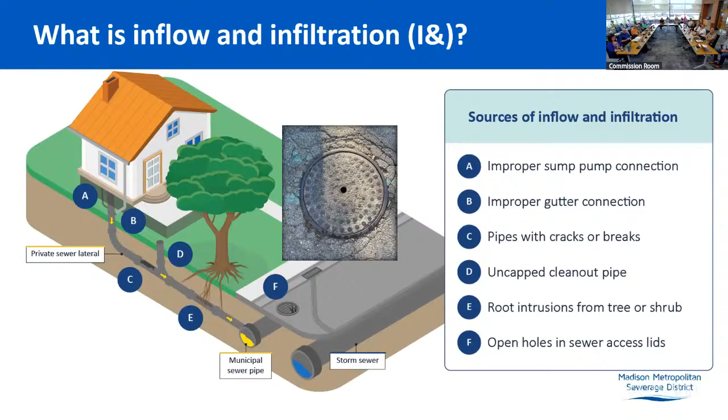So if we move into a little bit more on the municipal side, I'm going to bring up a picture. Open pick holes were often practice, and it is quite amazing if you calculate the amount of water that can come through that tiny little hole when you have, say, 6 inches of water standing over it, like we saw with stormwater flooding on Monday. That can be a big source, but it takes time to swap out all of those covers.

Here's an example of a poor connection. A lateral pipe was connected into one of the district's manholes. It was not sealed very well around the core, and we had gushing water coming in at quite the rate. That was an instance where we worked with the municipality, they worked with the private property owner—it was more of a company rather than a homeowner—and got that grouted and sealed up.

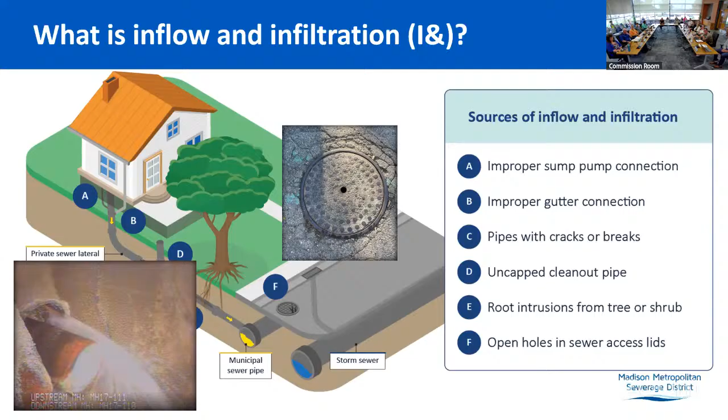But if you think about it, we have 1,500 manholes. Local municipalities have 10 times that, and then every single house connection. So it's kind of the needle in the haystack when you're trying to tackle all of these potential sources. And then one thing that never really gets mentioned, but I like to show this picture.

This is an example of a district manhole in the lower Badger Mill Creek drainage way. Most of the time it's dry, but this was during a March thaw a few years ago, and it becomes a raging river, basically. Once it receded, we looked, these are more sealed, have extra precautions in the construction of the manhole because it's a fairly new manhole. But if you think about any sort of cracks or leaks, you just have this large amount of water that can come inundating into the sanitary sewer.

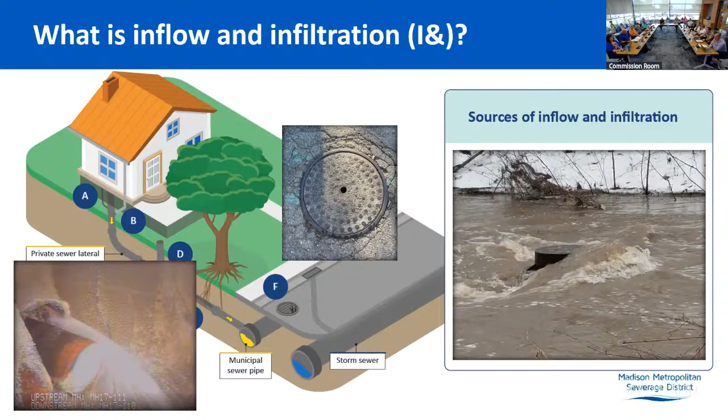So we are required to work on reducing inflow and infiltration, or preventing it. I like to say this is a maintenance program, called the Capacity Management, Operation, and Maintenance program. It's a requirement, a long-term maintenance program, and NR 210 is the code that governs this.

Basically the objectives are you're supposed to eliminate excess I&I. So there's a little bit of a difference there, right? Everybody understands that some is going to get into the system, but what we're trying to do is make sure that it's not excessive. The ultimate goal is we're trying to prevent those sanitary sewer overflows. Can we make sure that we can convey the sanitary wastewater within the sanitary sewer system, and that we're conveying it and treating it here at the treatment plant, so it's not escaping out into the environment.

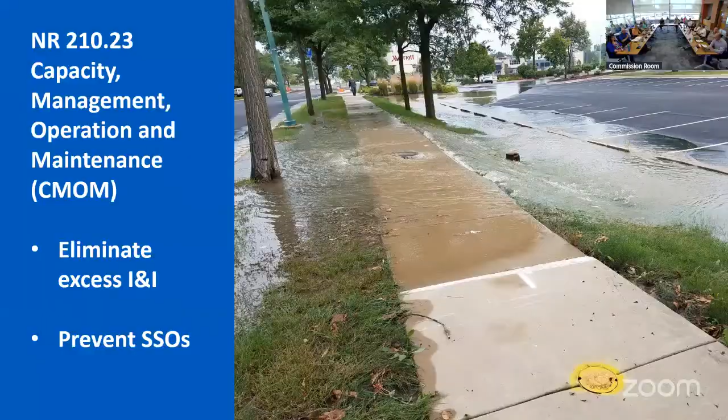So when we're talking about this, one of the main goals is, like I was saying, trying to prevent those sanitary sewer overflows. We're designing the pipes for a certain amount of flow, and the sanitary flow usually is relatively small compared to the capacity of the pipe. This graphic is showing that, based on average usage of wastewater, we expect on an average day that we're going to get a certain amount of what we call base flow.

And like on the right, there's still going to probably be some inflow and infiltration, typically more infiltration, kind of what you might have every day. That's a little hard to distinguish, as there's some cracks and leaks in the pipe or the joints that you're seeing typically every day. Then if you have a storm event and more of those inflow sources, that's where you start seeing something more on the left, where for a period of time you're going to have more of that clear water getting into the system, but then that should recede as the rain event passes, depending on how long it takes for that to come down.

And why we care is because we want to make sure that we can convey what we're getting. The less inflow and infiltration that we get in the system, the more available capacity for future growth. So when we're designing a pipe, we're looking out 70 years, and we're trying to predict what that growth will be, how much more will that base flow end up increasing. And then we also apply what we often call a safety factor in engineering, or a peak factor when we're talking about inflow and infiltration.

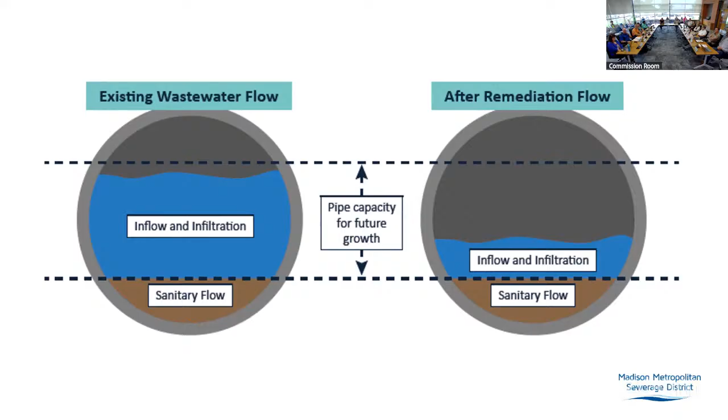So when we started talking about really developing an I&I program, or expanding on more of it, the district has been doing things for I&I for a long time. It's part of your maintenance, part of your general best practices. We have benefited from always being a separate sanitary system and not having combined sewers to try to disconnect and deal with that.

The peaking factors and the amount of I&I the district has seen has really been very low compared to a lot of our other regional entities that we would compare to. So this has been... but the 2018 very large storm events saw massive flooding and a lot of rain.

We did have some SSOs from that event, and that really brought the community together at one of the community meetings we had. I&I became a big topic in 2019 that we really wanted to start putting a little bit more attention to.

So in 2020, we formed an advisory committee of 6 representatives from our customer communities and started exploring what other people are doing for I&I. We spent a lot of time in 2020 on this.

What does King County do for their I&I program? What does Hampton Roads in Virginia do? We just talked about what everybody else is doing, what we liked, what we didn't like, and what some of our concerns were.

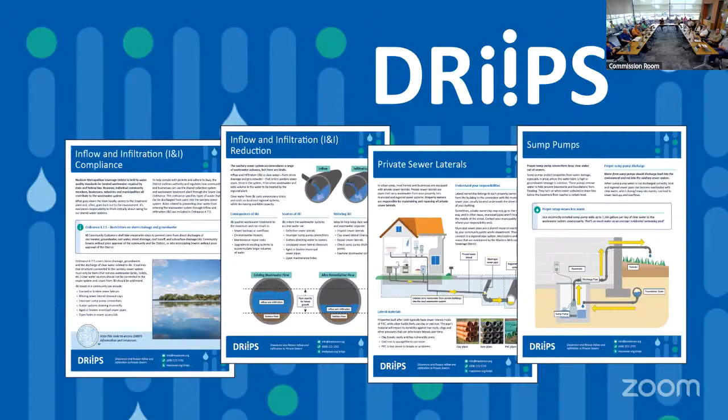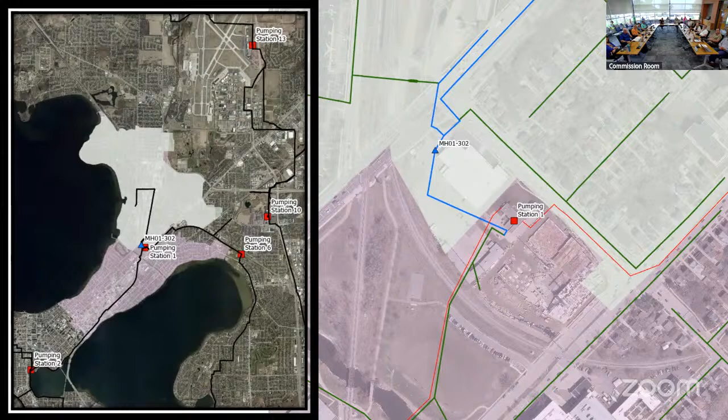So here's a little more close-up - we have non-contact battery-operated flow meters installed at this location. I'm specifying that because there's lots of different meters, lots of different ways. They can be a ring and an insert, they can be pressure or bubble sensing in the flow. It depends on how much flow. So there's a lot of considerations that go into all of this.

Some of the recommendations from our consultant were that in some applications, it would be more ideal for long-term monitoring to install, say, more of a flume with power and PLCs and all of that.

And so that gets expensive. And so the decision, after a lot of this learning too, is we're just not comfortable or prepared to make that kind of commitment to put in a dedicated structure with power and PLCs, because we're still trying to understand where are the best places for these. You can't just put them anywhere and expect to get good results. You have to have very certain hydraulic conditions and a certain amount of flow. So there's a lot of details that could go into this.

By using a non-contact, battery-operated unit with cell service, we can move this. If this turns out to not be a great location, we just pull it from the manhole and move it to another manhole. So this is a very low risk for us to keep growing at a slower pace, and learning, making sure we're doing this in a very thoughtful way.

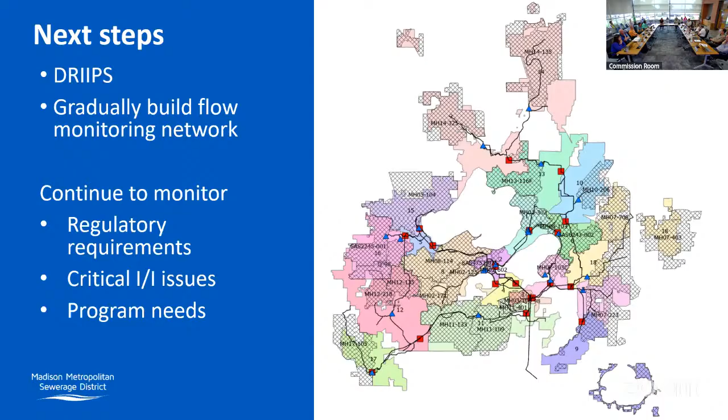What's our normal percent of base flow, including I&I and normal flow, in a typical interceptor, 30%? I guess the only way I can really assess that at this point would be based on what we see at the plant. We used to always say even the plant was like a 2.5, so it's a pretty tight system in general. That's really the only downstream total flow value that I have.

This is also giving more information and checks on some of the other data points we have. For instance, I realized something's not quite right with the flow meter volume recording at the pump station. It's a really old meter, it needs to be swapped out. So we're learning a lot, and this is all really valuable information.

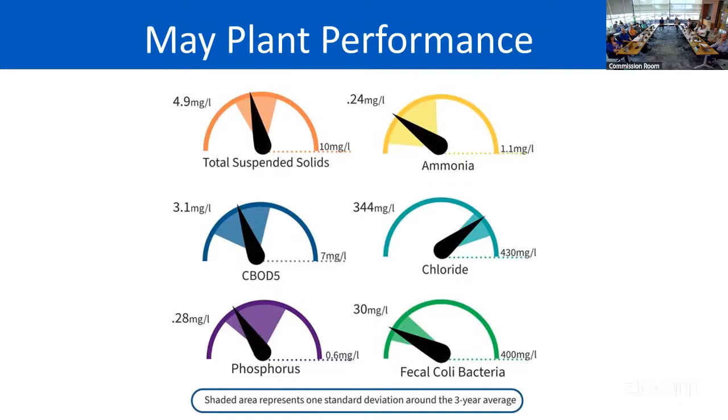One tiny little footnote, though, is we did have a TFO, a treatment facility overflow. This was related to some maintenance work that is ongoing. We're doing some digester cleaning again this year. A contractor cleaning out one of those tanks had a hose burst while they were pumping material out of that tank. The reason the hose burst is because at that point they started essentially pumping sand, and hoses and pumps don't like that.

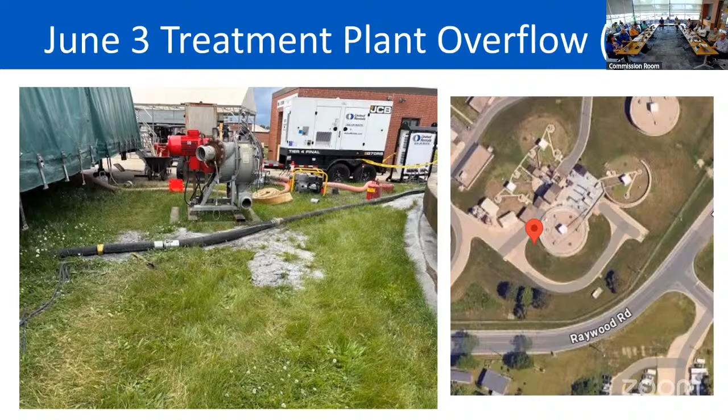Any questions about any of that? Nope. Okay, thank you very much.

Good morning, Commission. I have a legal services update and then a couple of regulatory notes I'd like to make today, too. For the last month, we have been working on a number of contract reviews, including, as the most significant project, the beginning of review of ERP work and the contract documents associated with that ERP work.

We also reviewed a number of easement documents over the last month, continued work on the sewer use ordinance updates for the district, and have been working on a number of open record request responses along with the district staff. I guess a couple of items I want to note specifically.

So we've also continued work on the Badger Mill Creek litigation, and on June 16th, we received a decision from the Circuit Court affirming the Department of Natural Resources' decision to grant the amendment request for the district.

So there is a process by which the City of Verona, who had challenged that DNR decision, could appeal. That appeal would be due on July 31st. So there's kind of an open period right now where we'll wait to see whether the city chooses to appeal the Circuit Court decision. We also, if you'll note on the agenda today, have a closed session scheduled, so that will include a discussion more specifically on the legal strategy regarding that Circuit Court decision and this ongoing litigation.